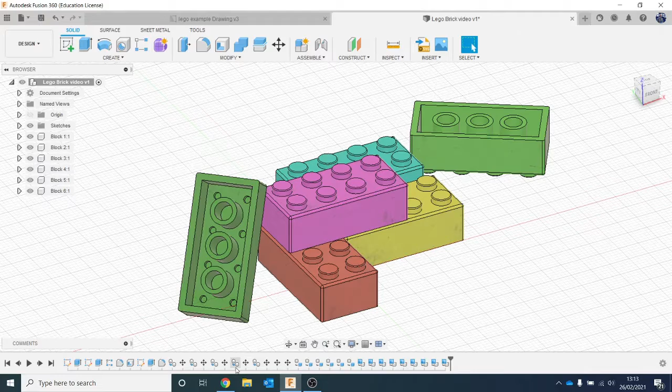So one thing I had a look at, I thought, what else could we add into it? So I had a look and thought, okay, Lego, that's a children's toy, so probably some sort of toy chest. I quite like the idea of some of these treasure chest style ones.

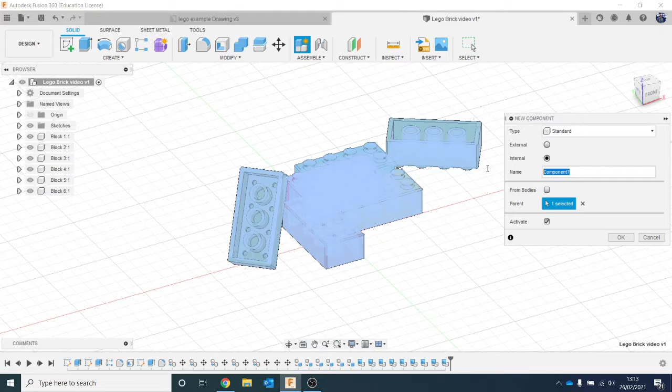So before I did my bodies first and then I created components, now what I'm going to do is start a component from scratch. I'm going to right click at the top, go on new component, and call that toy chest, hit enter. So on the left hand side, toy chest has appeared with a dot next to it, which means it's the active component, so what I'm doing is going to appear in here.

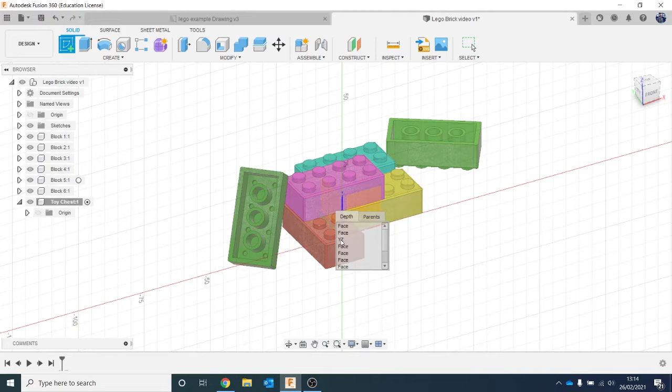So I'm going to go on sketch and click on the side plane. Now at the minute I can't reach it because my models are in the way, but if I hold down the left key of my mouse, I can click it that way. That will let you pierce through anything that you've got.

Now I've realised I need to move this model up a little bit, that's clearly going to be going through the floor a little bit later. So I'm just going to make a little toy chest, using the 2-point rectangle.

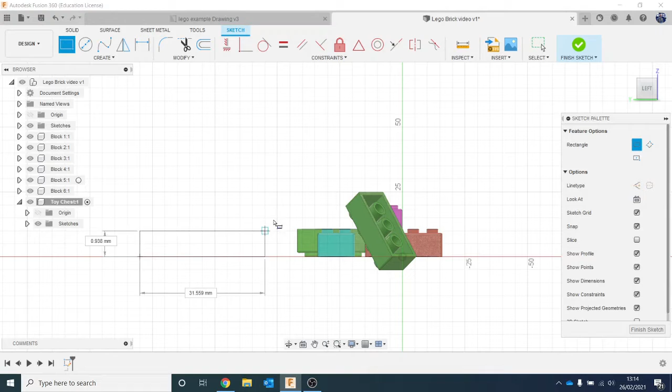Now I'm not going to be as precise with these, this is just to give it a bit of background detail. If this whole video or project was about designing a toy chest, obviously I would do more detail and exact measurements, but this is simply just to add some background to what we're doing.

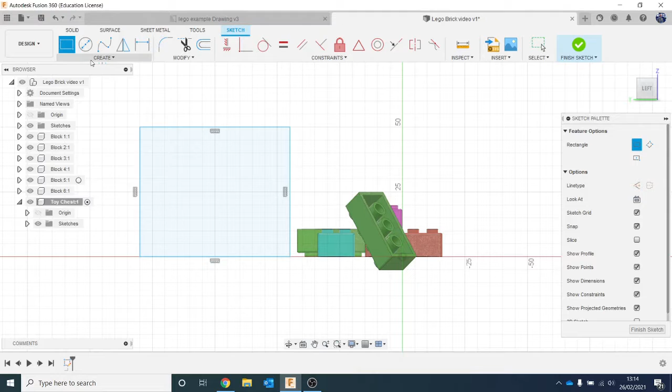So then I'm going to go to circle. Now I don't want a center diameter circle, I'm going to go 2-point circle, because that'll let us click on this point, go across and click to that point. Now there's excess lines there, so I want to trim those off, so I'll go to modify and trim, or hit T as a keyboard shortcut, that'll let me get rid of those.

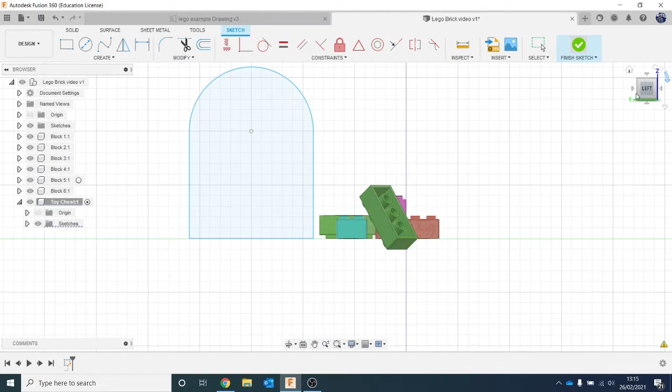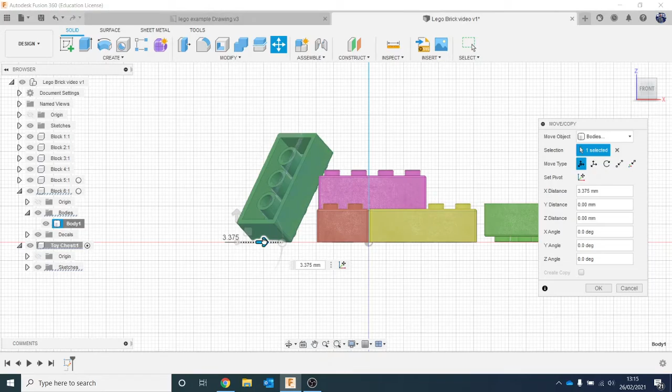I'm going to hit finished. Just quickly, while I've noticed it, I am going to move this block because it's going to irritate me otherwise. So I'm going to click on move, that just needs to come up, like that, to make sure it's in the right place, like that. Okay, that's better.

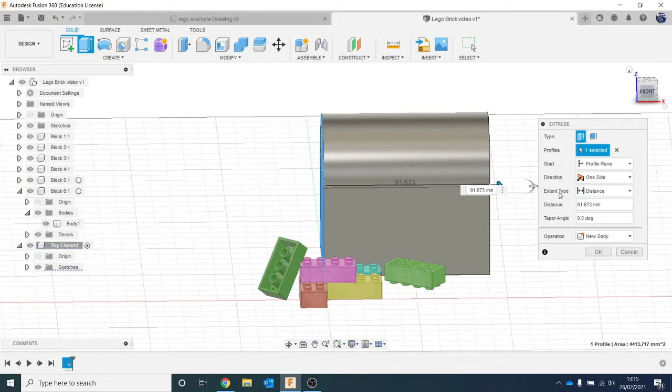Okay, so I've drawn my chest, so you can see my sketches have appeared there. I'm going to click E on my keyboard for extrude, and just pull it out to see how big I think this toy chest should be. Maybe a little bit bigger, like that, and hit OK.

So now you can see under toy chest, my body has appeared there. At the minute that's just a solid piece, we need to give it a little bit more detail. So first of all, let's make the actual lid and make it open.

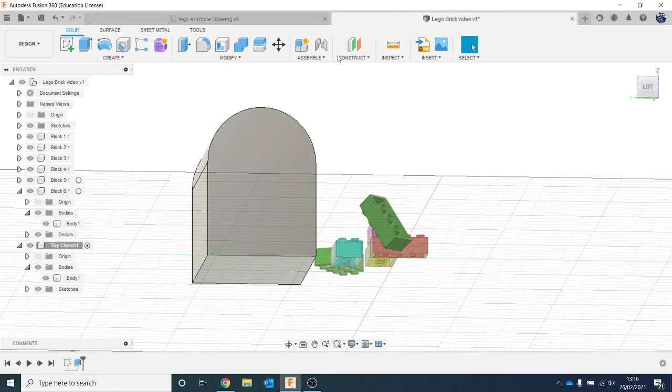So I'm going to click on construct on the top menu, and go to offset plane, and click on the bottom of this chest, and that'll give me a little arrow that I can drag up on this plane. Now I'm going to use this plane as a tool to cut something, not quite in half, but cut it into separate pieces. So then I'm going to click OK.

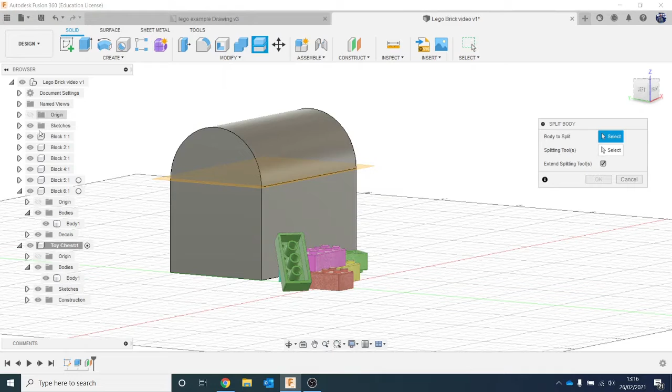So now what I'm going to do is go to split body, so modify and split body. Now keep an eye on the left hand side under body, I've got body 1 there, but check what happens in a second. So body to split, this big body here, I want to split that apart. Splitting tool, I want to use this offset plane, and when I zoom in, you'll see it's made this little red mark.

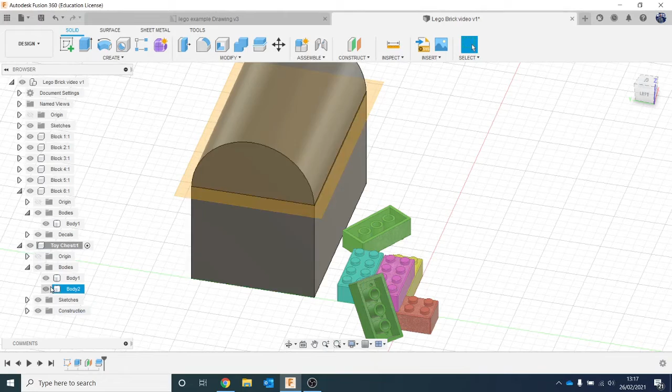That's basically saying this body is going to be cut around that. I'm going to hit OK. And you'll see that two bodies have now appeared, because it's now been cut.

So I can get rid of that offset plane. I can go to construct here and hide it. I don't need that anymore.

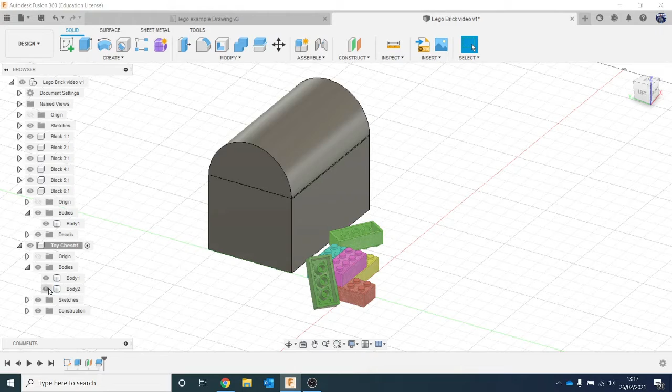So let's move it around, make it a little bit more realistic. Let's click on the lid. So that's not the lid, that is the lid. Let's click on it and move.

I'm going to open it on a hinge, but I want the hinge on the other side, so I can change where the pivot point will be. I'm going to go to the menu here, set pivot, click on set pivot, and it will let me choose where that pivot point will be.

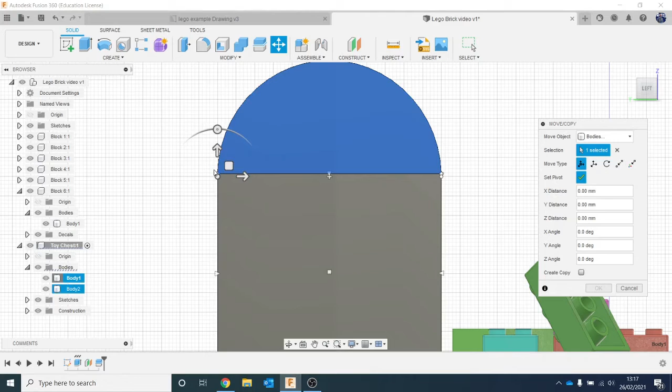So I'm going to click on this point there, and then go back to done. Now I can move this little sliding scale and open it up like that. I'm going to hit OK.

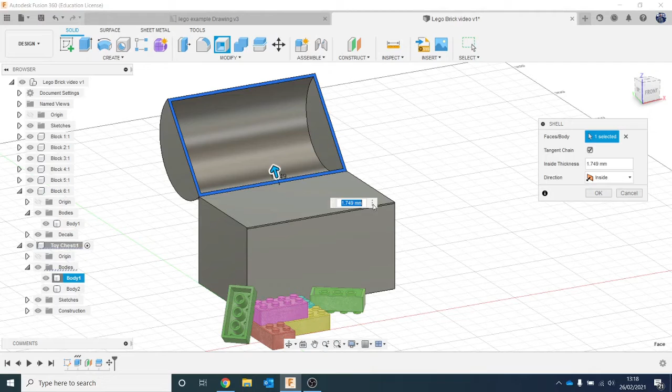Again, it's still a solid piece, so it's not quite looking right. So let's shell it out like we do with our Lego block. Let's click and do maybe 2 mil. OK, let's do the same again - click on this, type in 2, and hit OK.

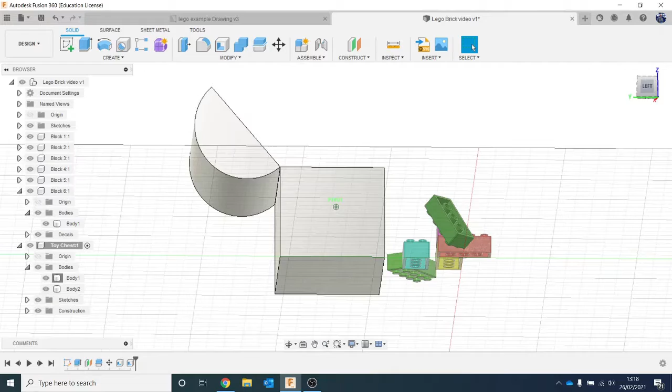The whole reason I'm moving it now is because I want to join it back together again, and they need to intersect a little bit. So you see there, they just intersect a tiny little bit. Go on, OK.

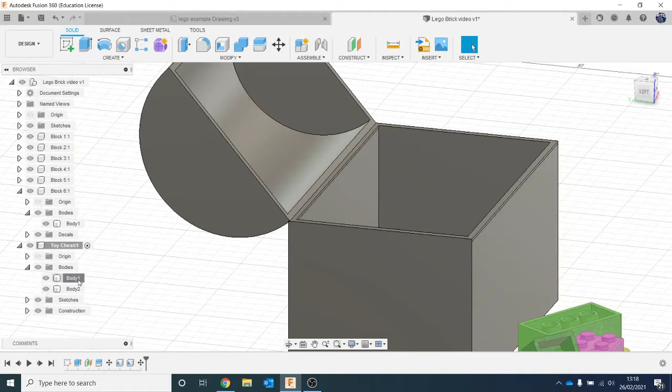Like that. Now again, keep an eye on where it says I've still got body 1, body 2, but I'm going to combine them. So I'm going to go to modify and combine. Target body, this one. What do I want to combine it with? This one. Make sure it's on join and hit OK. And you see now I've just got one body again.

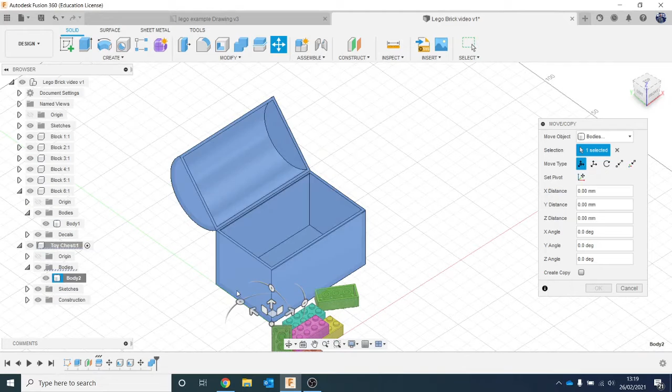So I'm going to move it so it's not really, really square. Let's just have a look, rotate it around a little bit, move it out of the way. Something like that - I think that looks nice.

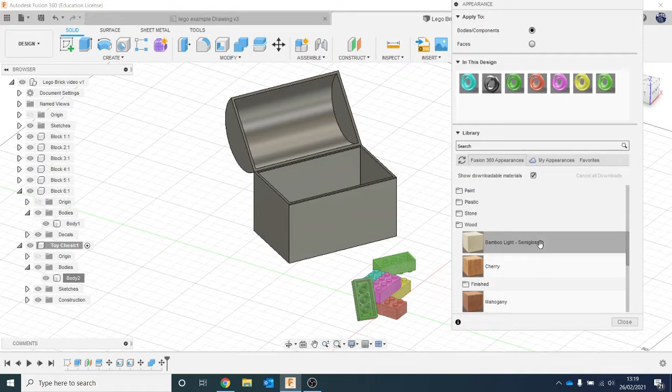Okay, so let's add some materials to it. Again, we're going to go to A for appearance. I think we're probably going to have a wooden toy chest of some kind, so let's have a look what we've got - where are we for woods? Let's have a look at something like pine. That's nice and light, very good.

Okay, so I might want to add some decals. If we had a look on here, we've got some little details of animals and things like that. Now I have already downloaded some animal decals from the same website - I just typed in like 'animal', like cartoon animals. So let's insert those - let's go to insert decal.

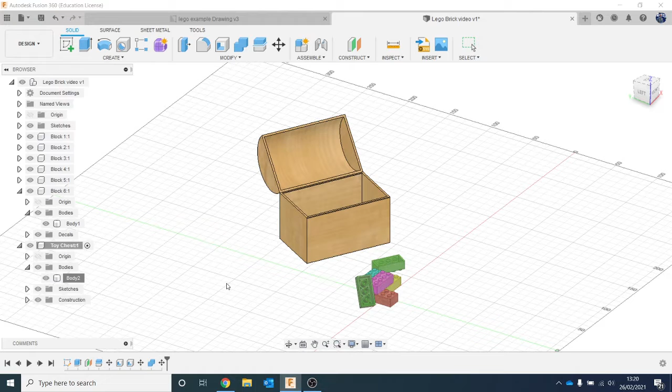And let's have a look. So I've got an animal there. Let's click - now if it comes out the wrong way around, you can just rotate it nice and easy. So I want that, let's change that to 90, and let's make it a bit bigger.

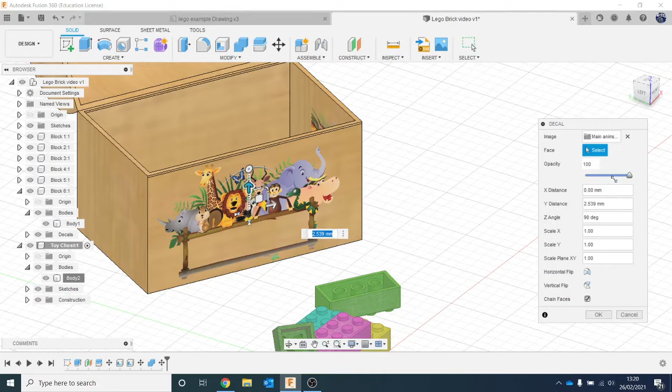It's a little bit too bright, I feel, so let's just turn the opacity down a little bit. Let's do a little bit more so it looks a bit busier. Do side.

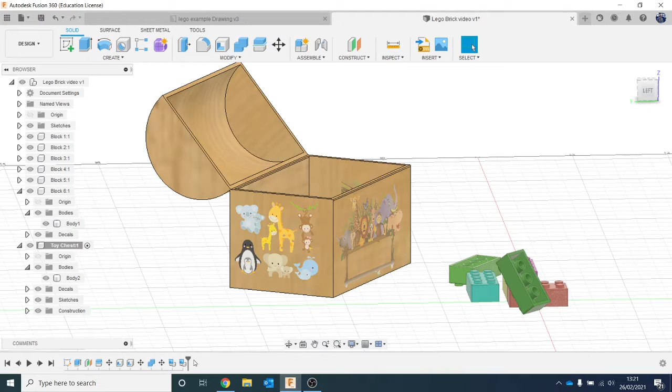Let's do exactly the same on the other side. Oh, I didn't turn the opacity down on that. So remember, if ever you do submit and you want to undo or change what you've done, down at the bottom on your history, you can always go and edit these features really, really easily. So just because you've done something doesn't mean it's stuck ever - you can always go back and edit later. It's nice and easy that way.

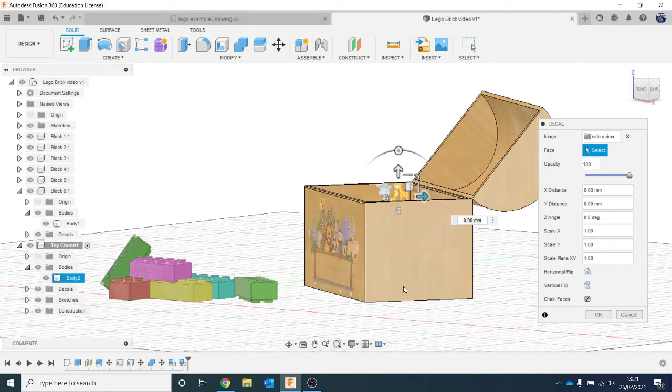So go to decal. Oh no, that was the wrong face - I did not mean to select that face. Let's move it into position.

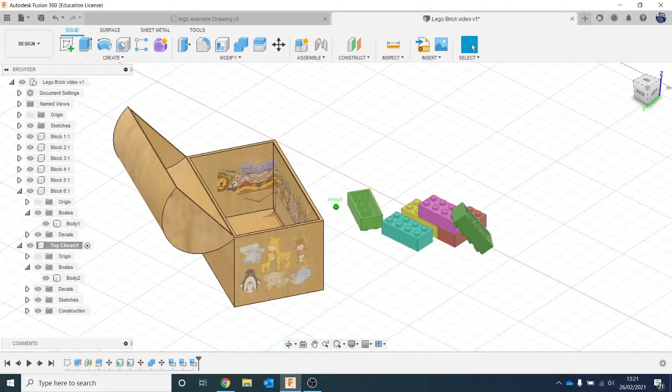Like that. Okay, so we've not spent a lot of time on that. That's just there, so it's part of the background. And you see what happened here. Now, I didn't turn chain faces off on one of these things. So let's go back. So I think it was this first one. So let's go on edit feature. Yeah, so if I turn that off, you'll see now back in that chest again, you can't see those pieces. That's why it's always a good idea to turn chain faces off. Otherwise, it tries to wrap around a bit.

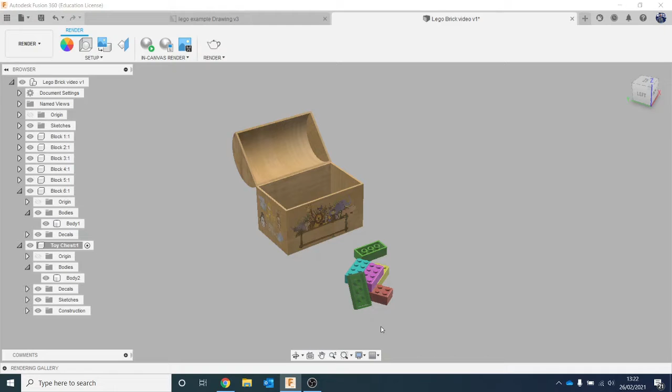Okay, so now I'm going to go back to render. So we're going to jump back between render and normal workspace. So you can see a bit more context to it, but it's still sort of floating in the nothingness, isn't it? So let's have a look at giving it like a floor and walls. So that'd be nice and easy to do. So let's make a new component. So I'm going to right click at the top, new component. Let's call this scenery.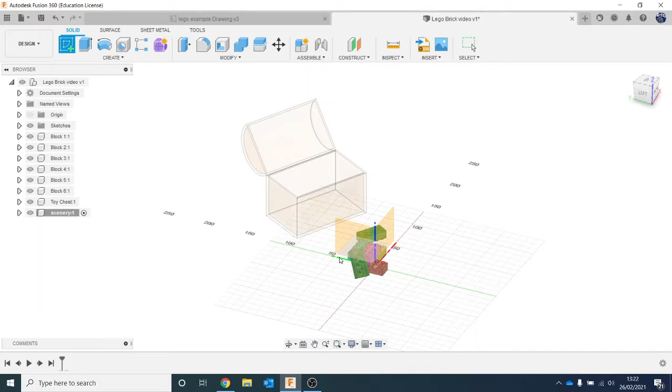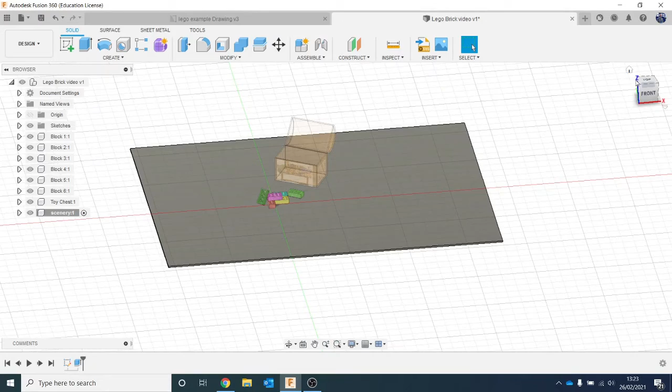So I'm going to click on create a sketch. Let's create on the bottom plane. And let's draw a big rectangle like that. Go on finish sketch. Go on extrude. We're going down because we don't want to interfere with what we've already done. I'm going to do the same on the side here, so I'm going to click on this side piece.

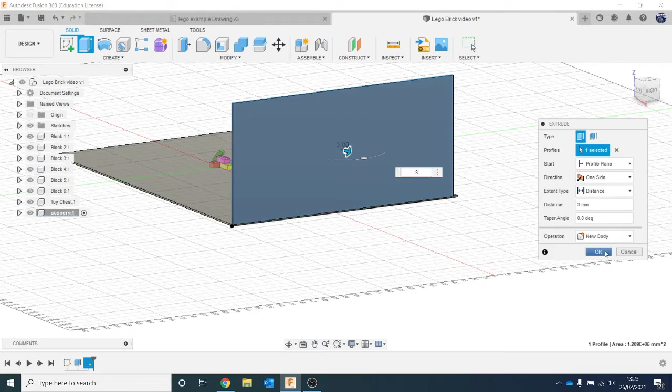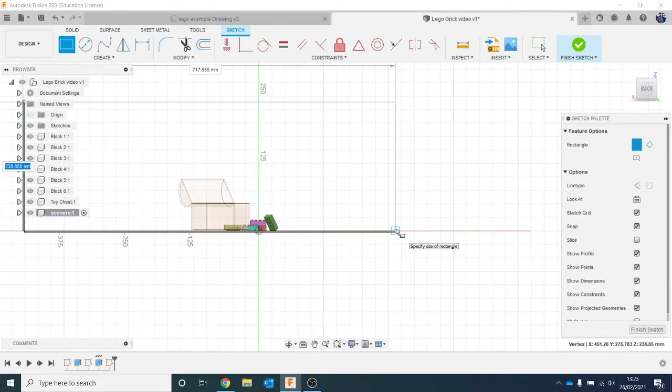No, I don't want that to join, so I'm going to extrude this in a second now. So I'm going to go on extrude. I'm going to go 3, sorry, not -3, because I wanted to make sure it's a new body, not joined, like that. And then let's do the same. Now I have made a little bit of a mistake there, but we'll sort that in a second. Let's go to create a sketch on that face, because actually then you won't see the mistake I've done. Let's just join from there to there and finish. Again, let's go extrude.

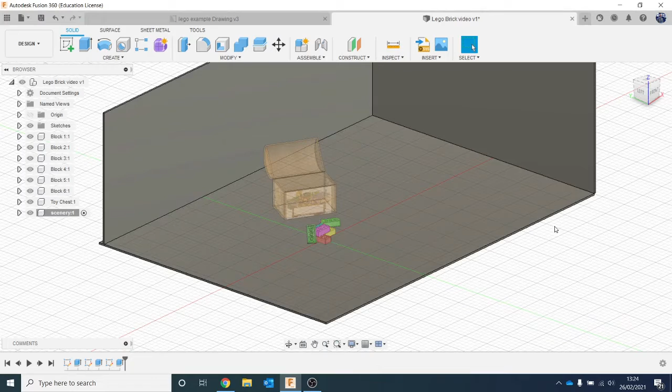So new body. So in fact, it doesn't matter that I've got that little bit of overlap there. So you can see now I've got basically like a scene you might see in like a TV show kind of thing. So you can see like 2 walls and a floor. So we can extend those out a little bit if we want to, but again, we still want to make it look a little bit more realistic, because at the minute they're just black. So we're going to add some more details to it. I didn't mean to do that there. So let's go back to the workspace.

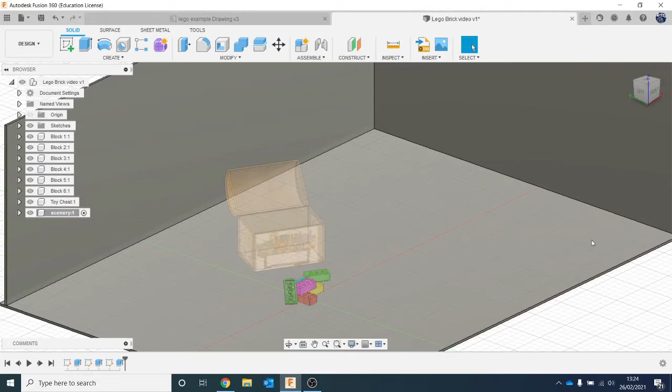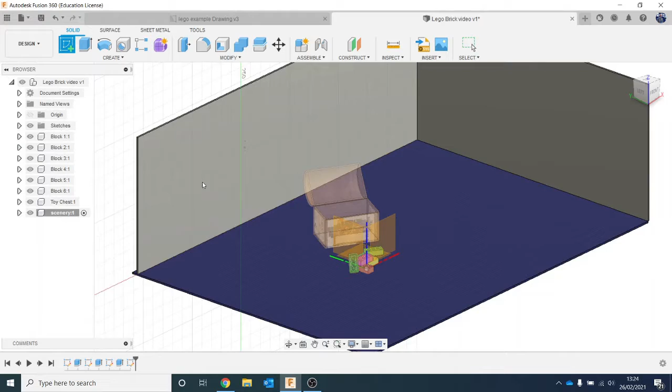So for the flooring, we'll go to appearance because I'm sure there are some fabrics in there. So let's go to leather and cloth, blue, so we can have a nice little carpet. Go done on there. Now I'm going to add a few more little details. So for example, I'm probably going to do a little skirting board just because I think it'll make it look a little bit more realistic. But remember, you don't want to spend a huge amount of time on the scenery because it's not the focal point. It's just like an extra feature just to make it look more realistic.

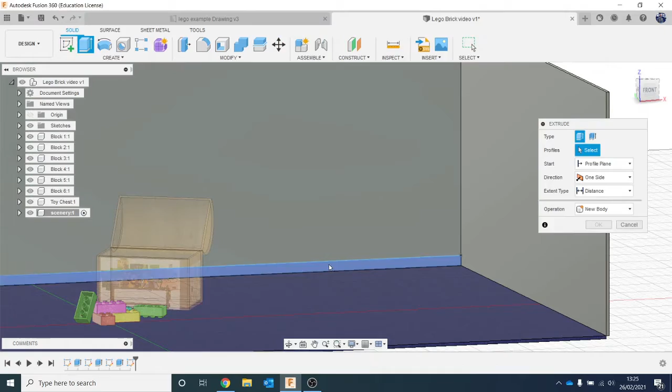So I'm going to put this there. So then let's do extrude, and I'll come that out 5. Now you see at the minute it's trying to turn everything blue because it's joining. Once things join, if it's already got a material to it, it wants to make everything have that material. So I'm going to go to new body, and it'll not try and do that anymore. And then, at the minute that's just nice and flat, but we don't want that because skirting boards tend to have a little bit of a draft angle.

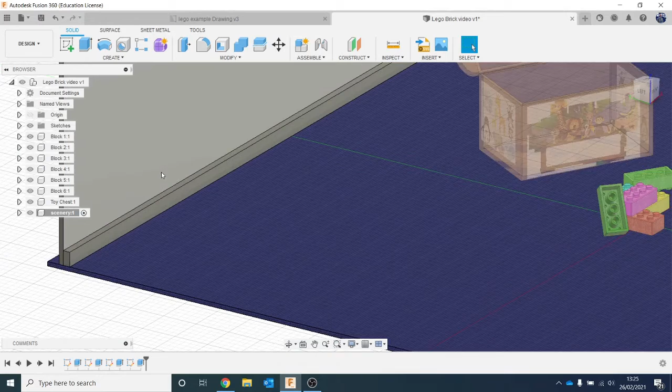So we go to modify, draft. Now where do I want to pivot it from? So from that surface, and I want to pivot this top bit. So let's bring it up and say 40 degrees. So you see it nice and easy from this angle here. So it's making it a little bit sloped, like a little mitre.

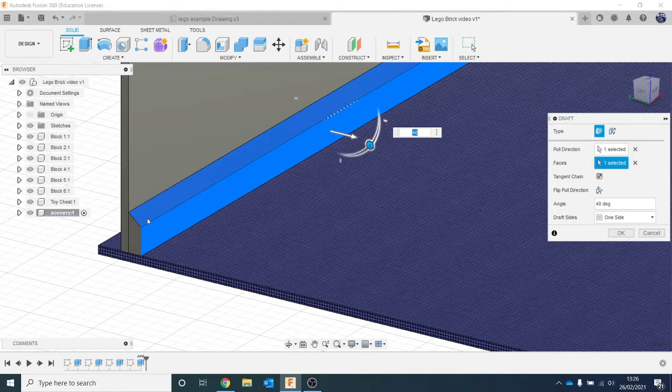So with the draft, the first thing it asks you to do is the pull directions. That's basically what are you going to hinge it from. So I selected this face here. So that was done. Then what face do you want to do? So I picked the top piece, which meant that basically it used the hinge on the corner there. I'm going to hit OK. And then let's do the same on this wall here.

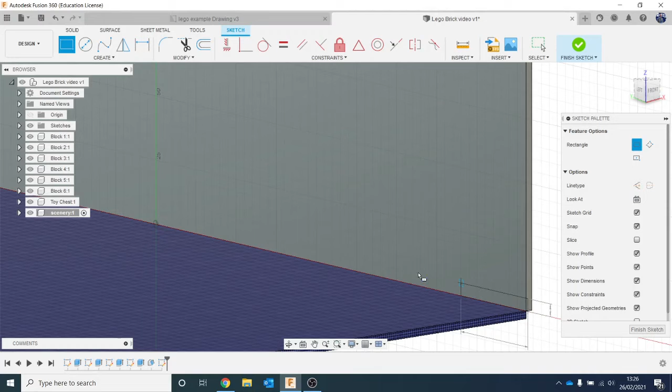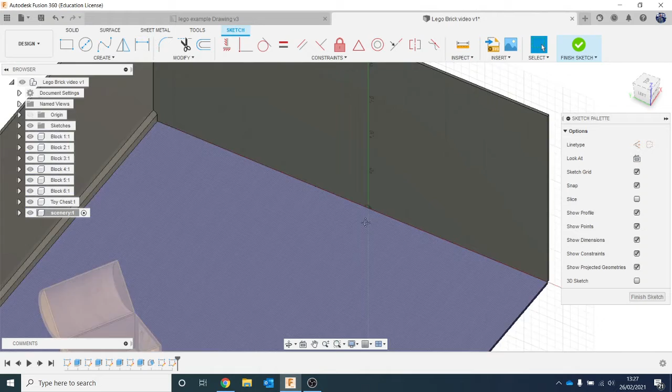Let's get a rectangle. Let's match it up. Like that. Go on finish. In fact, let me just move that a little bit actually. I'm just going to delete that. I made a bit of a mistake, so I'm just going to double click the whole thing to delete it and do that again. I want it to intersect because I'm going to join it in a second. So I'm going to start again. Get my rectangle.

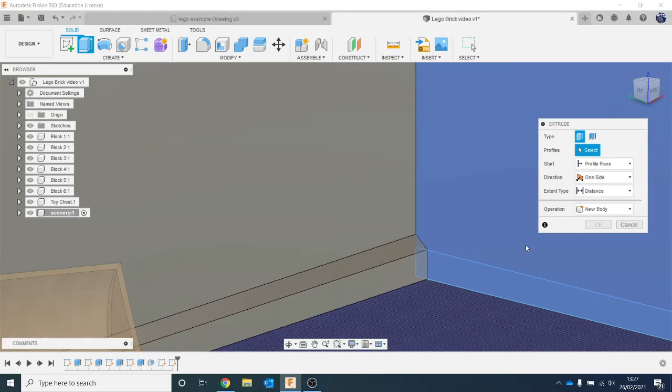There we go. And I'm going to go on finish sketch. So now I'm going to extrude it, and we did the same, the one we did before. I extruded that, and we did that 5. So let's do the same again. So let's go 5. Say new body,

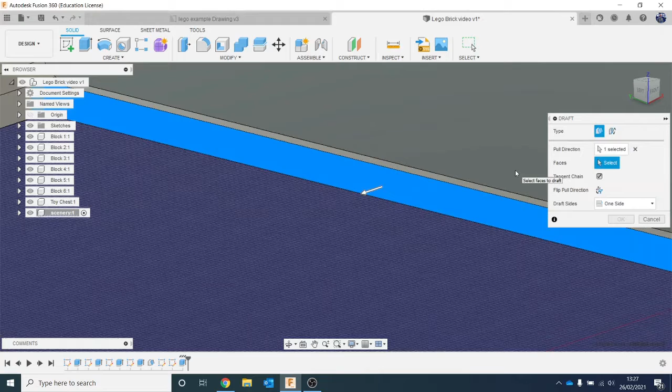and then same again. Let's go on draft. So watch again. So we're going to go to draft, pull direction. So where do you want to hinge it from? There. What piece do you actually want to pull? That one. Now it remembers the degrees we did from before, so it does 40. So I'm going to click OK. See how it joins nicely in the middle there.

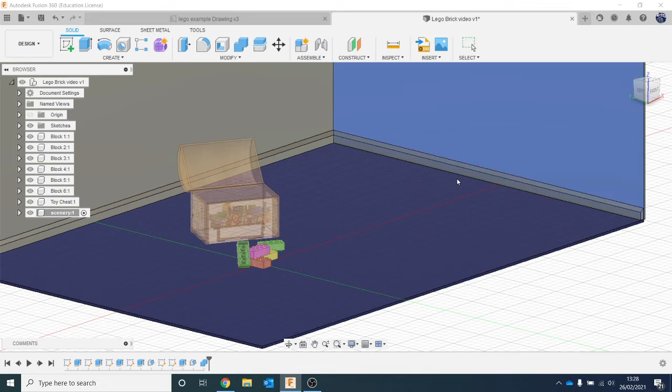So I'm going to join those together. So I'm going to go to Combine. Combine that piece and that piece. And done. So do a bit of skirting boards. Let's add some appearance to that. And let's paint that like a glossy white. So let's try that. Go and close.

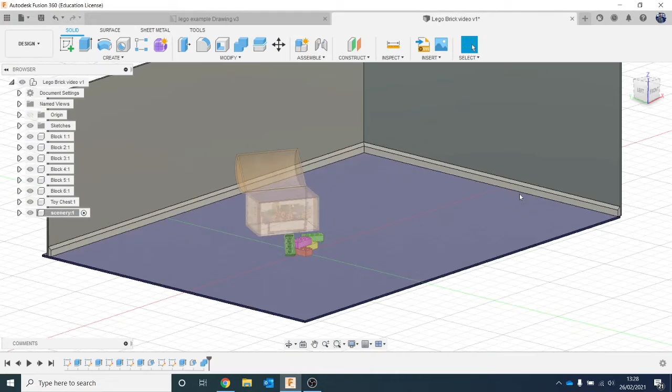And then I think the last thing really would be to add some wallpaper to it. So I'm going to insert a decal. So I've already taken another decal. Now for this one, I didn't get a PNG because the reason we got a PNG for these ones is we didn't want a background to it. But all I searched for, and I'll put the files that I've used in the descriptions of the videos as well, so you've got that there.

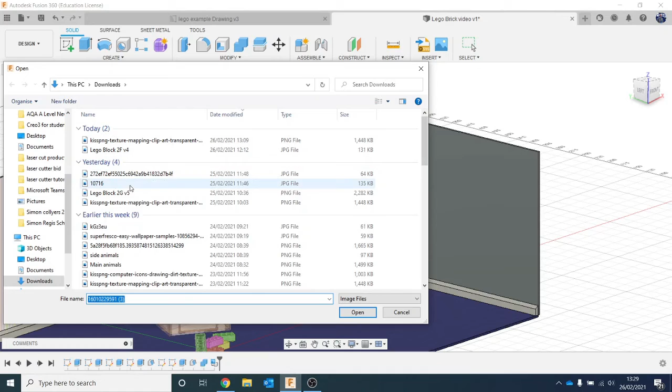So I think it was this one. There you go. I literally, on Google, just typed in simple patterns for wallpaper, and it was a JPEG, and I'm just going to drag it so it covers the whole area. Going OK. And let's do the same on this one. Let's go insert decal. This wall here.

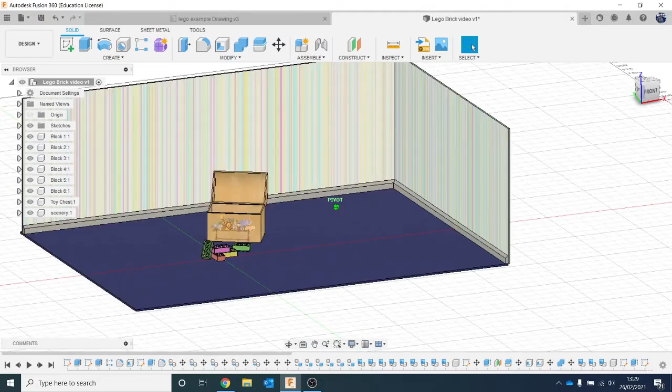OK. So you can see I'm going to activate at the top at the minute. I've still got the scenery as the active component. I'm going to go to the very top and activate the whole thing. So you can see it all, and I'm going to zoom in a little bit so you can see what's going on. And then I'm going to jump back into render, zoom out a little bit. Like that. So you can see what we're doing.

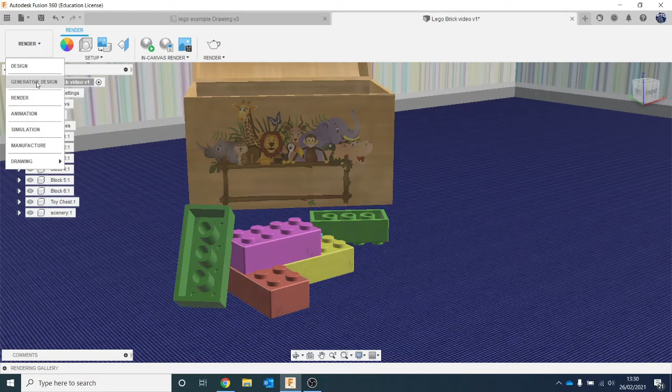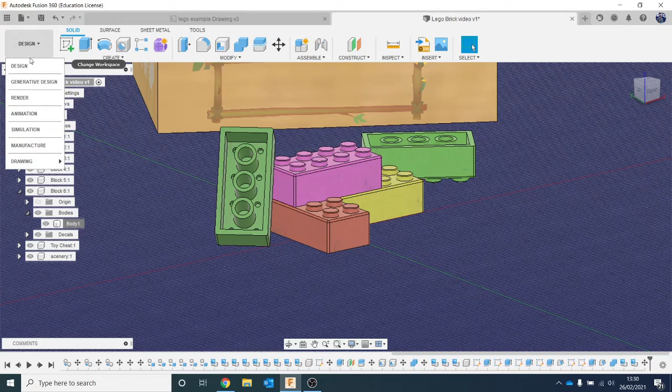So the main point of the whole exercise really was to show the Lego block. Now I'm going to change a little bit, that's intersecting a little bit. So let's just jump back and quickly move that. Let's go back to design, and that was that block, so let's just move that a smidge. Like that. Okay, so then let's jump back to render. I think I was zoomed in too much there, so let's try that again. Go to design,

render. So most of our time was spent with the Lego block, making sure it's nice and accurate. And that obviously, for what we're doing, is the main emphasis of the project. So say we were designing a product or a piece of furniture. But we spent a little bit of time then adding some decals, which you can see, to make it look a little bit more realistic.

But then we did a little bit of scenery to give the whole idea of the design some context. But you can't really see a huge amount of detail in it, because obviously you don't want it to take away from the attention of what you've actually done. But you can see a little bit of the background in it. You can see the skirting board, see the toy chest. What I might do is copy and paste a few more of these blocks, have them scattered around a little bit more like that. So that to me then would be a finished first project.

So we've done our modelling, we've added decals to it, we've made a scenery to it. So the last thing really would be to render it. Now I'm not going to render it on video live the whole time because it took quite a bit of time to do it, because like I said, I've got a relatively basic laptop. But we're in the render workspace now, so you can do in canvas render.

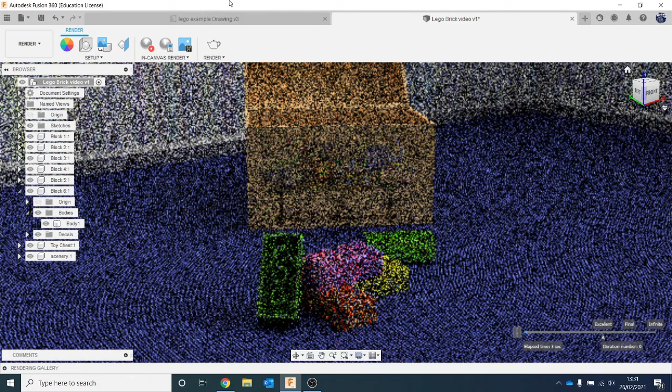So I'm going to click on in canvas render, and you'll see what will happen in a second. It'll start to go fuzzy, and it'll start to get clearer as it gets a really nice quality picture from what I've done. I won't carry on with that. I'm going to stop that there, but I will at the very end show a picture of what the final render looks like. But that was